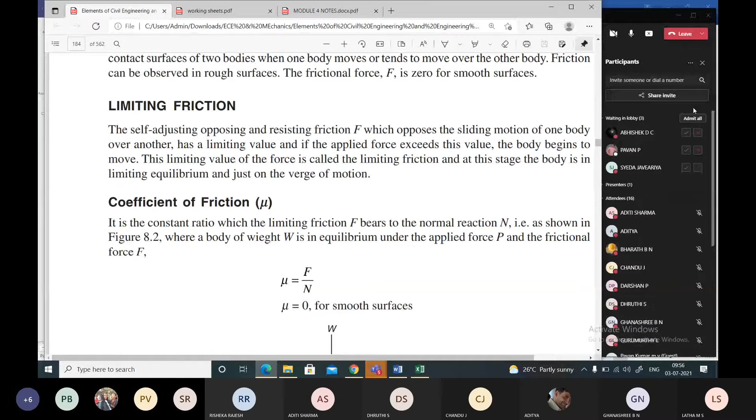How do you define friction? Resistance offered to the motion at the surfaces of the bodies is known as frictional force. Yes, it's a frictional force, the resistance offered against the motion, isn't it?

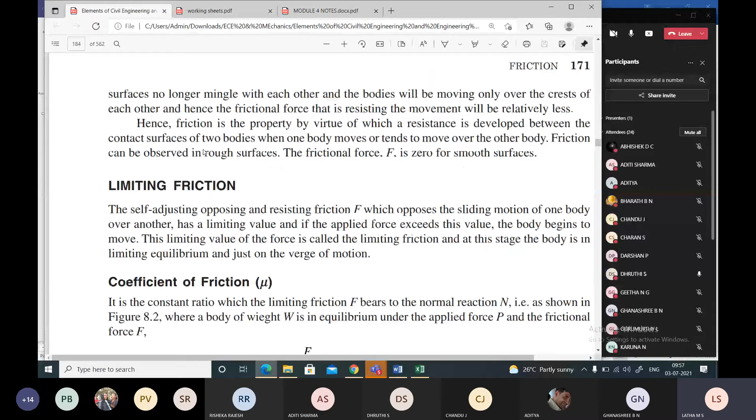Right, so what are the different types of friction do you find? Static and dynamic. Yes, static and dynamic. In dynamic, we have sliding and rolling friction. Is that all I taught only Dhruthi in the class, and what about the rest?

Ma'am, fluid friction, dry friction, ma'am. What about others? Others can answer. It's not mandatory, but when your teacher is asking you, it's your responsibility to respond. Clear, students? You cannot be quiet. I'm telling you repeatedly, once this vaccination process completes, you will be on offline mode. So you don't have much time. We have to quicken up.

Ma'am, first dose or completely second dose? Do you have to get completely vaccinated or no? Having the first dose is enough for now, we'll update you on the steps or levels. Don't worry. If you are vaccinated with the first dose, very good. Okay, I have done it, ma'am. Okay, fine.

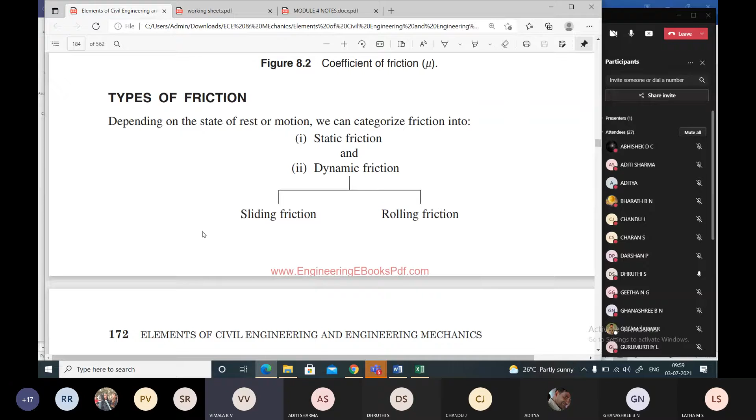Now, what are the different types of friction? Students, I want a mass answer. You cannot be silent. It's written on the screen, but you cannot just read that, I'm asking the whole class. What are the different types of friction? Static friction and dynamic friction, ma'am. Dynamic friction has two types, ma'am: sliding friction and rolling friction. Very good. Next, other student, tell me what is static friction.

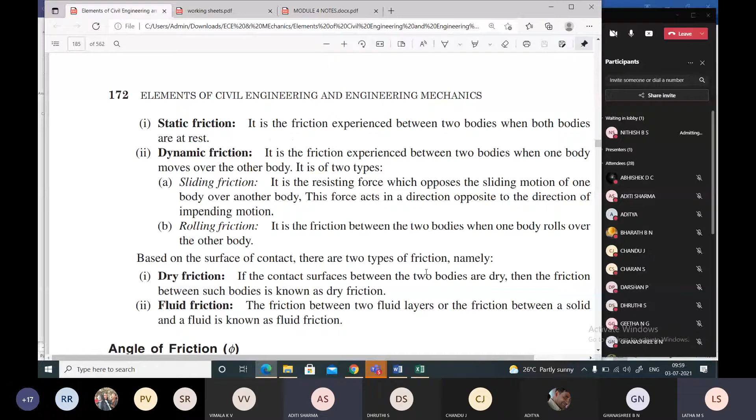Define what is static friction. Any other student? Ma'am, the friction experienced between two bodies when both bodies are at rest. Yes, which are at rest. Any other student, not the same student.

How do you define dynamic friction? Any other student, pick yourself. What about the boys in the class? What is dynamic friction? Okay, I'll pick your names one by one, that would be a better way to call upon, right?

Darshan, Darshan, Darshan P. Darshan P is not in class. Shafahad. Shafahad. Sunil. Yes, ma'am. Can you define what is dynamic friction? Looking at the screen, you have to read out, ma'am.

It is the friction experienced between two bodies when one body moves over the other body. Yes, very good. Dynamic friction is such a friction which is developed during the movement of the body. It can be either one of the bodies - if it moves, it undergoes dynamic friction.

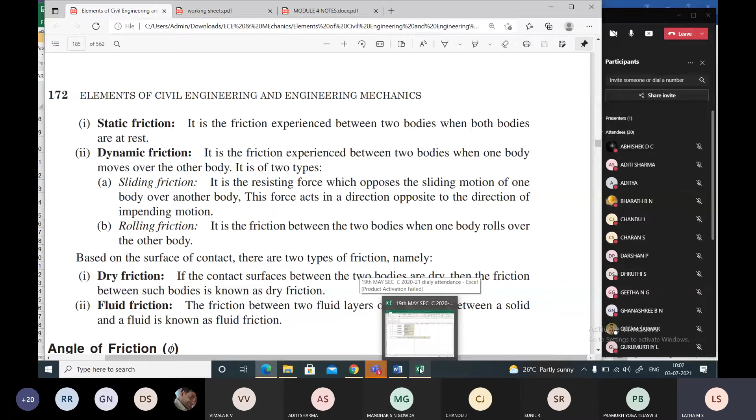Now, the friction is again divided based on the contact surfaces, right? What are the types of contact surfaces? You, Gurumurthy, tell me what are the different types of friction based on the surface of contact. Dry friction and fluid friction.

Very good. How do you define dry friction? If the contact surface between the two bodies is dry, then the friction between such bodies is known as dry friction. Yes, that is called dry friction. Correct. Now next, what is fluid friction? Next person, Gulam, tell me what is fluid friction?

The friction between two fluid layers, or the friction between a solid and a fluid, is known as fluid friction.

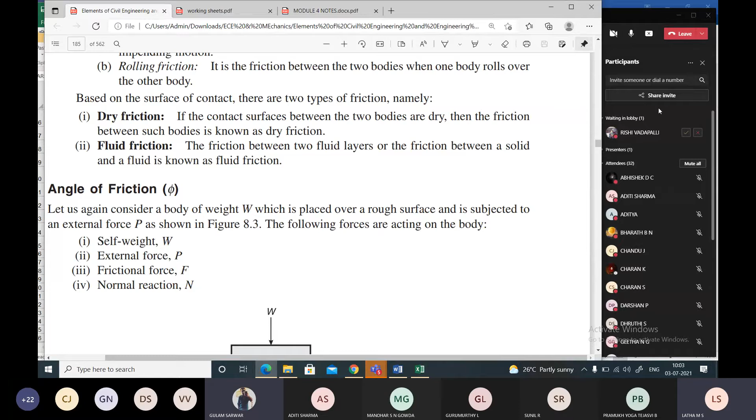Next we learned about the principles of friction. What are the different types of laws, and how are they categorized? Charan, what are the different types of laws you find?

Force of friction always acts in a direction opposite to that in which the body tends to move. Laws of friction are two types: static and dynamic. The force of friction always acts opposite to the direction the body tends to move, and the magnitude of the force of friction is exactly equal to the applied force which moves the body. The magnitude of the limiting force of friction bears a constant ratio to the normal reaction between the two surfaces in contact.

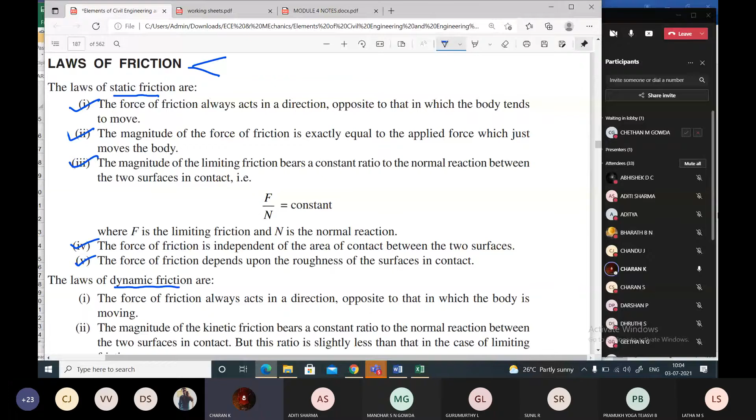The force of friction is independent of the area of contact between the two surfaces. The force of friction depends on the roughness of the surfaces in contact.

Chandu J, tell me what are the laws of dynamic friction? You can read from the screen. Yes ma'am, I'll tell.

The force of friction always acts in a direction opposite to that in which the body is moving. The magnitude of kinetic friction bears a constant ratio to the normal reaction between the two surfaces in contact, but this ratio is slightly less than that in the case of limiting friction. The friction force remains constant for moderate speeds but decreases slightly with increasing speed.

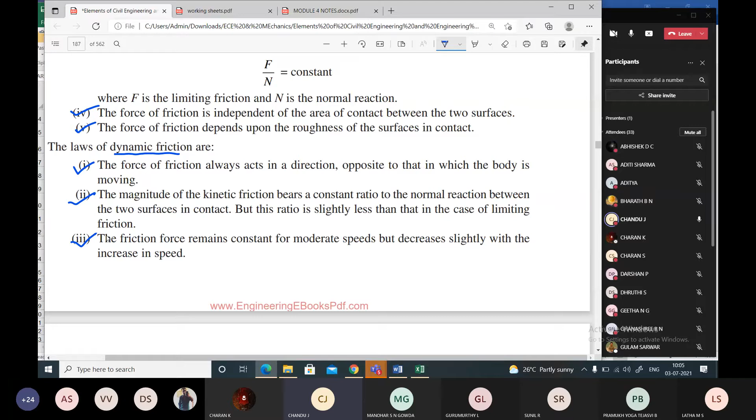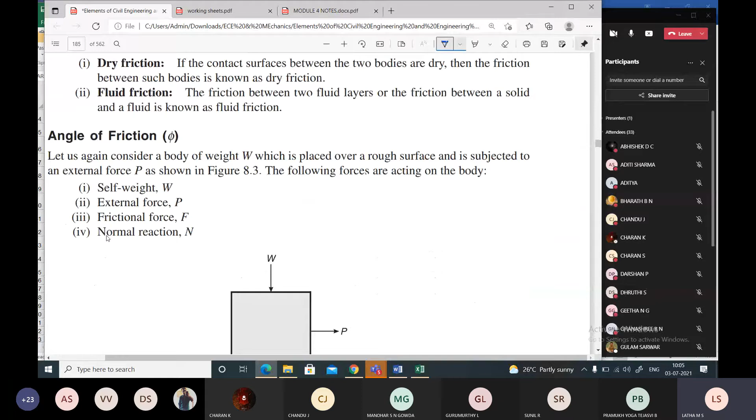Great, very good Chandu. Next, what was the discussion after knowing the laws? We started with the definition, isn't it? So what was the first definition we learned? It's limiting friction, isn't it? What's limiting friction, Ashish?

Ashish is there? Vinay? Vikas? No. Tell me now, what is limiting friction? You can read from the screen. Self-adjusting, opposing and resisting friction which opposes the sliding motion of one body over another has a limiting value, and if the applied force exceeds that value the body begins to move. The limiting value of the force is called limiting friction, and at that stage the body is in limiting equilibrium and just on the verge of motion.

Sure, did all the students understand? A body which is at rest will experience some amount of friction, which is just called friction. But a body which is just starting, or on the verge of moving, will experience a friction called limiting friction.

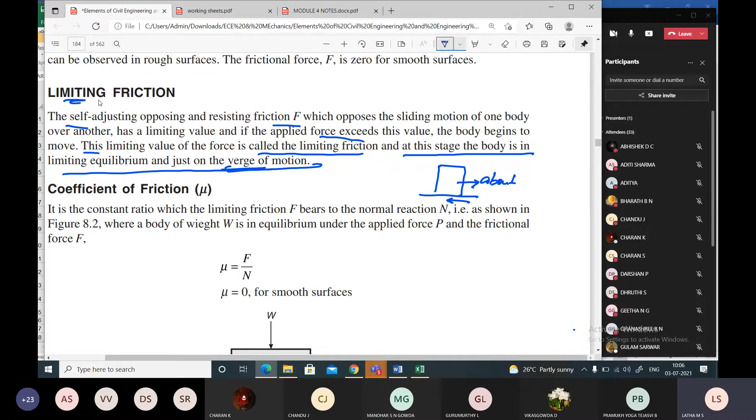Now what is next, what is coefficient of friction? Can anybody tell me? I'll call the name before Vamshi. Vamshi Krishna is there? Preetham? Preetham Nayaka, yes ma'am, tell me what is coefficient of friction?

One minute ma'am. It is the constant ratio which the limiting friction F bears to the normal reaction N, as shown in figure 8.2, where a body of weight W is in equilibrium under the applied force P and the frictional force F. So we give this equation as mu is equal to coefficient, mu is equal to F by N.

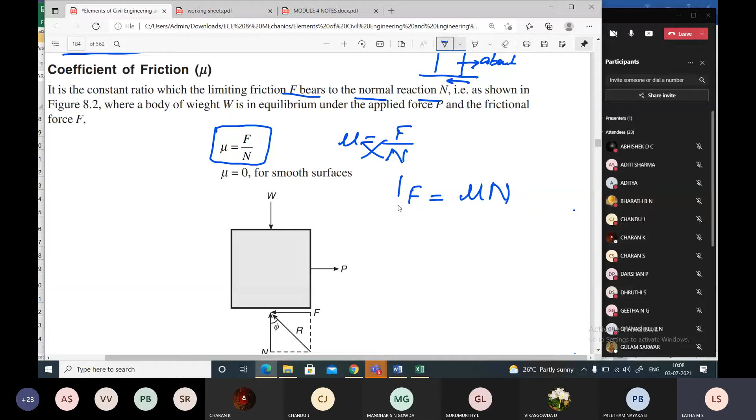Or can I write, students, F is equal to mu into N? Can I write this? Yes or no? By the definition of coefficient of friction, I define that mu is equal to F by N. What is F, students? Frictional force, please remember it is frictional force. And what is N? Normal reaction, please keep this in mind.

And the diagram, you have to refer to this diagram. You can see this diagram: the total weight of the block is W, a person is applying the force P. You find the frictional force opposite in direction to the applied load, and this is the normal reaction opposite to the total load acting on it.

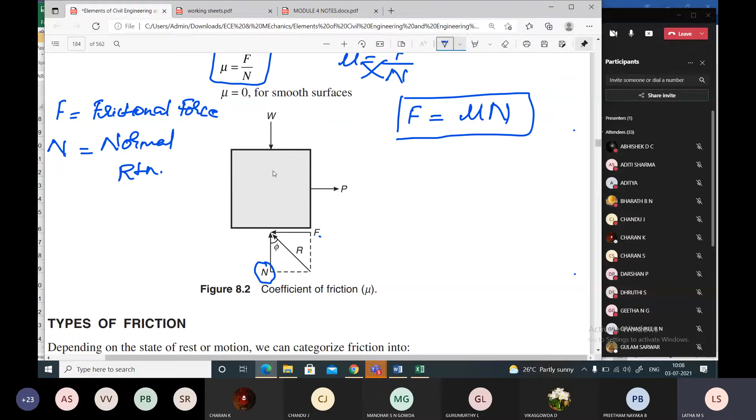So what is coefficient of friction, students? When they ask you the definition of coefficient of friction, you have to write that it is a constant ratio which the limiting friction bears to the normal reaction N. And you have to draw the figure, then give the expression, and state that mu is equal to 0 for smooth surfaces. You are all remembering this, right?

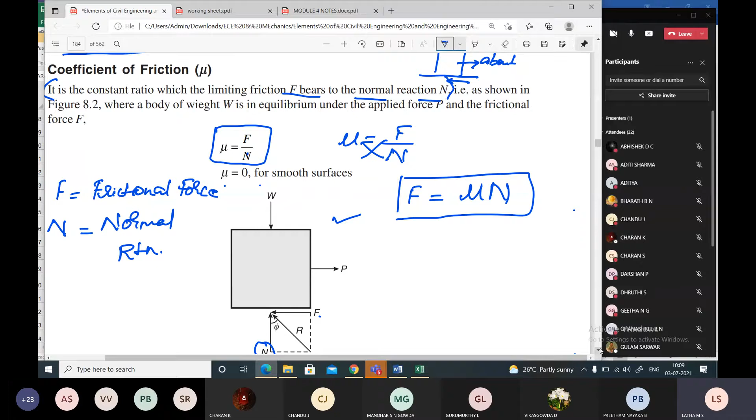And I'll ask you now in the next assignment to write all these answers for the questions. I'm not asking you to write it down now quickly, but you have to be alert in the class, right? It is a very easy scoring topic.

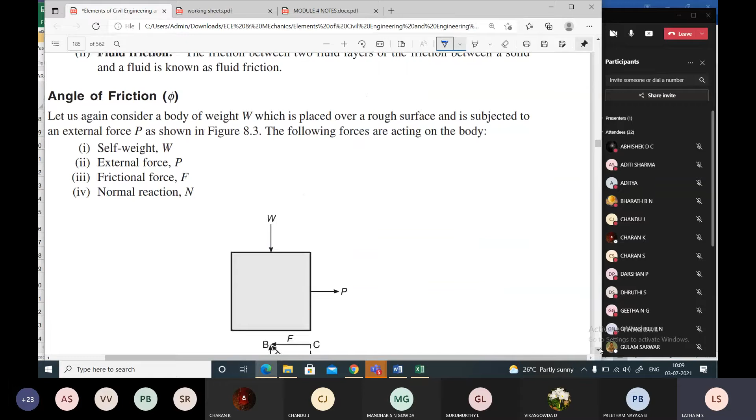Okay students, fine, now what is angle of friction? Prashant Raj? Pawan Kumar? Pawan Kumar MB, yes, tell me what is angle of friction?

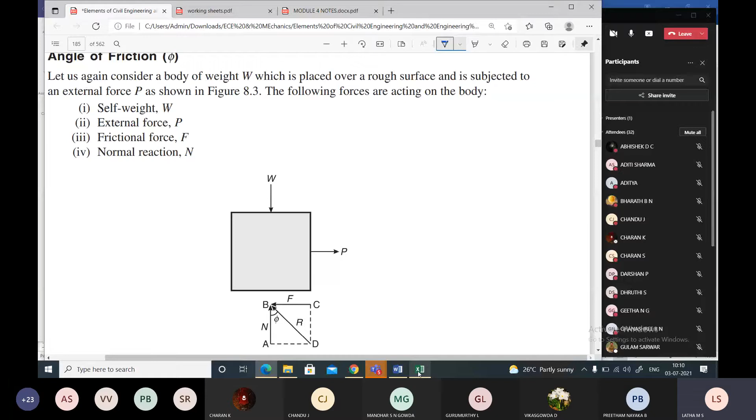The definition is here: the angle of friction for two contacting surfaces is the angle between the resultant friction force and the normal reaction.

Resultant of friction and normal reaction is denoted as phi. What is given, you have to write this definition and represent tan phi. It is denoted by phi, and you have to draw the diagram.

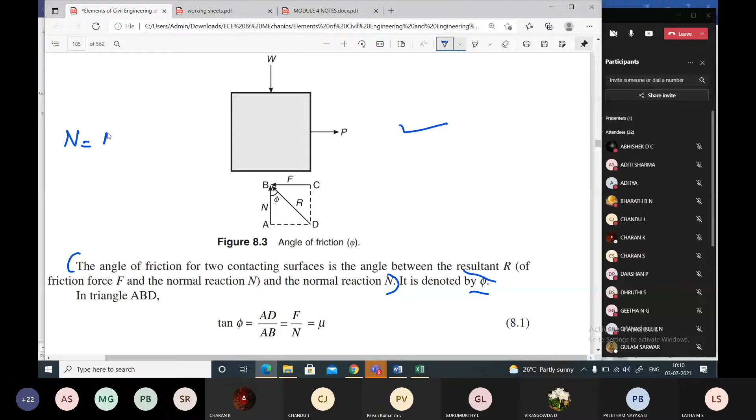So what is N, students? Normal reaction is... Yes, normal reaction. How does this normal reaction come? Because of W, equal and opposite.

What is F? Frictional force. Yes, frictional force, correct. Then what is R? You can see from the diagram, the resultant of frictional force and normal reaction, that gives us R.

So from the triangular concept, we get tan phi equals F by N. What is F by N again, from the earlier definition? Mu. Yes, that mu is the coefficient of friction.

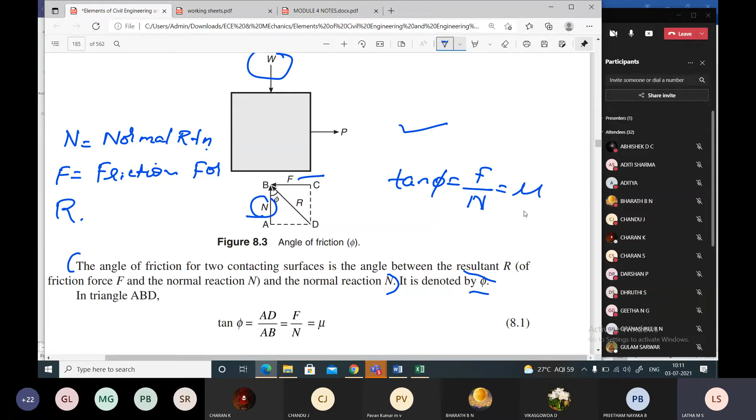Now next, angle of repose. Nithish? Yes ma'am, tell me angle of repose.

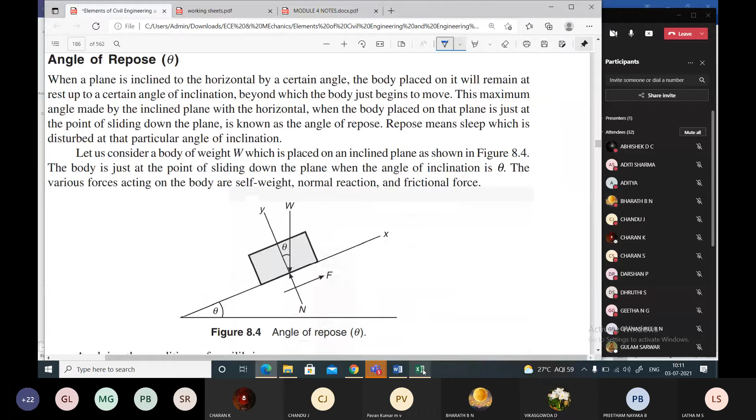When a plane is inclined to the horizontal by a certain angle, the body placed on it will remain at rest up to a certain angle of inclination, beyond which the body just begins to move. The maximum angle made by the inclined plane with the horizontal, when the body placed on that plane is just at the point of sliding down, is known as the angle of repose.

That's enough. What did you understand, Nithish? What did you understand with that? Now, for example, I'll take a worksheet.

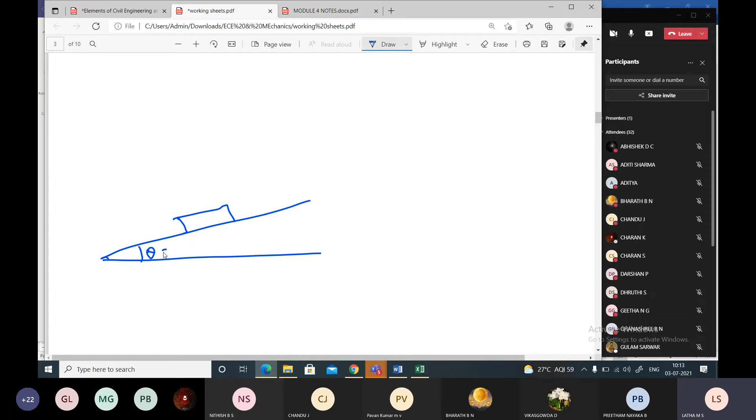Angle of repose. I'll draw one straight line and an inclined line. I'll keep a box here. Do you expect this box to slide down at some angle theta, 10 degrees or something? It may not, or it may be. Now I'll tell you, this box weighing W will not slide down. It will not move down. So it is still at rest.

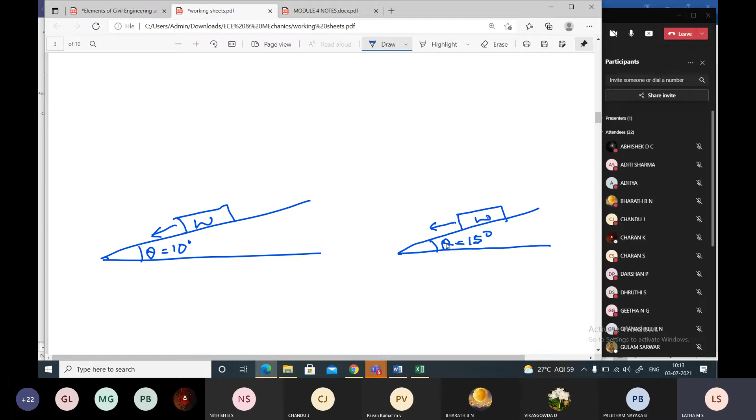Now, with the same setup, I'll increase the theta value to 15 degrees, and place the same block at the same position. Will the block slide down? It may or may not. Correct, it may or may not be, but the possibility is I'll think it is still at rest. Even at this condition, it is at rest.

Now further, when it is not moving, I'll incline more, let's say 20 degrees. So this block will start sliding, start moving or sliding down. So at this point, on the verge of or just starting to slide down, this angle we call the angle of repose. Did you all get that?

Did you all get this, students? Did you follow, the class, did you all follow? What is angle of repose? Am I audible to you? Yes ma'am, the minimum angle at which the body starts to slide down.

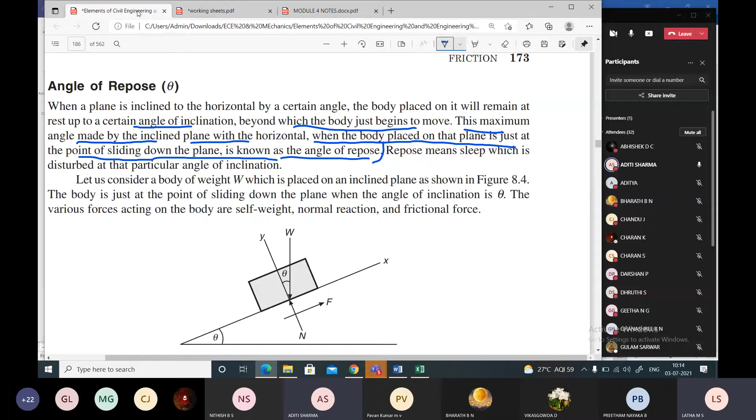Now from the diagram, yesterday we started with the diagram, placing the same block, something like this. And remember, students, the weight of a body will always act straight down, not inclined. It will act straight down only.

Now we have kept a box on an inclined plane at an angle of theta. I'll draw the x and y axis along the plane itself. So applying equations of equilibrium, I'm repeating yesterday's derivation. We'll start doing it here.

Summation of Fx is equal to 0. What are all the forces you find? Do I need to resolve this force, students? This is along the x-axis only, so no resolution is required.

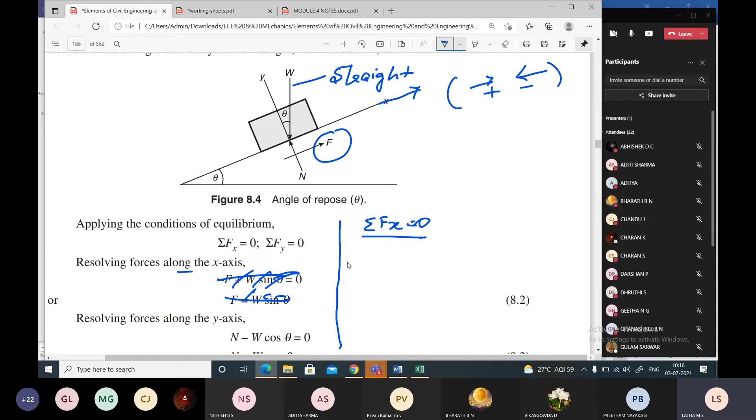So if you don't follow, don't worry about this step, you'll get the same answer. Now how is it moving? To the right side it is plus, and to the left side it is minus. Correct? So plus F. Resolve this, resolve W.

When you resolve, what angle is it making? 90 minus theta. So how is it moving? When I resolve, it will move to the left: W cos(90 minus theta). Is there any other force to resolve, students?

Okay, I'll wait for your answer, then I'll proceed. Till you answer me, I'll not continue a step. Just before I said you had to respond to your teacher. You have to interact.

Did you follow this step? Yes ma'am. So I can simplify writing this as F is equal to W cos 90 minus theta. Correct? So F is equal to W cos 90 minus theta.

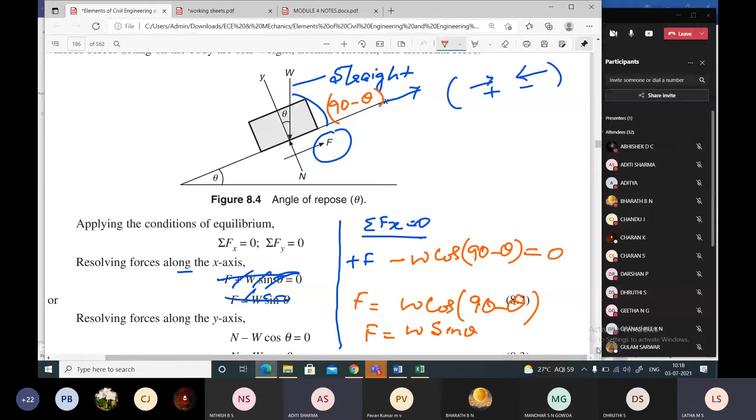What students? What is cos 90 minus theta in trigonometric function? Sin theta, ma'am. Secant theta? Secant theta or sin theta? Sin theta, ma'am.

So similarly now apply equation of equilibrium along Fy is equal to 0.

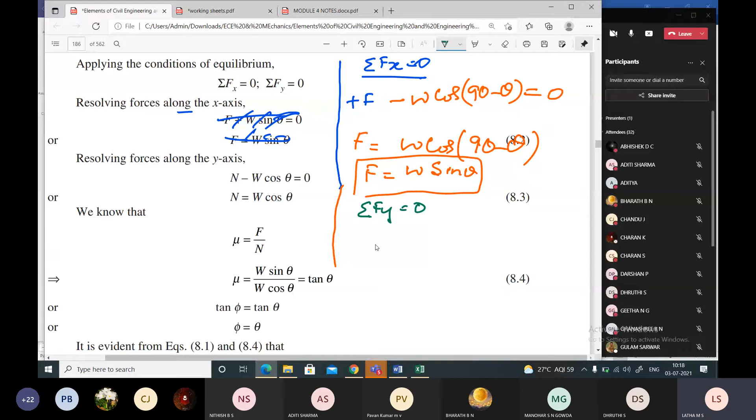Now resolve the forces. What are the forces you find? N and W. Okay, how N is moving?

How N is moving, students? Along the y-axis, it's moving along the y-axis. So it doesn't require any resolution of N. So how is it moving? It is moving upwards, so upwards we take it as positive, downwards we take it as negative. Correct? So upwards positive, so plus N.

Then resolve W. What is the resolution of W? W resolution. Resolution of W, students. Along y-axis.

See, if you don't reply, you are irritating a lot. Without interaction it is not possible to proceed with your class.

W sin 90 minus theta.

Without interaction it is not possible to continue the class, students. If you talk, then I'll continue. If you are not talking, I'll not. Tell me.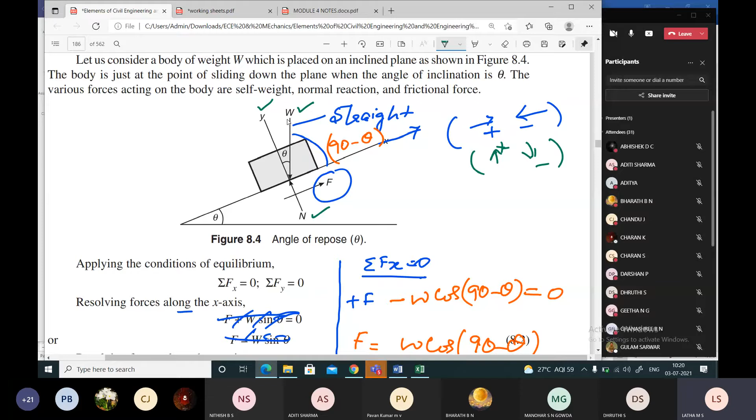W sine 90 minus theta, ma'am. Yes, W sine 90 minus theta. What are all the other forces you find for the resolution? How is it moving? Sine 90 minus theta, downwards ma'am. Downwards, so minus sine 90 minus theta, which is equal to 0.

Therefore N is equal to sine 90 minus theta. Correct? Or we can write it as N is equal to cos theta. So 1 divided by the other. So this is, sorry, W. This should be W, right? So the equations divided by each other, we'll get it as

what? F by N is equal to W sine theta by W cos theta. W cancels. F by N is equal to what? Sine by cos?

Tan theta. But you find F by N is also equal to what, students? According to the previous definition. Mu. Yes, mu. Or you find tan phi. This tan gets cancelled, I'll be left with theta is equal to phi.

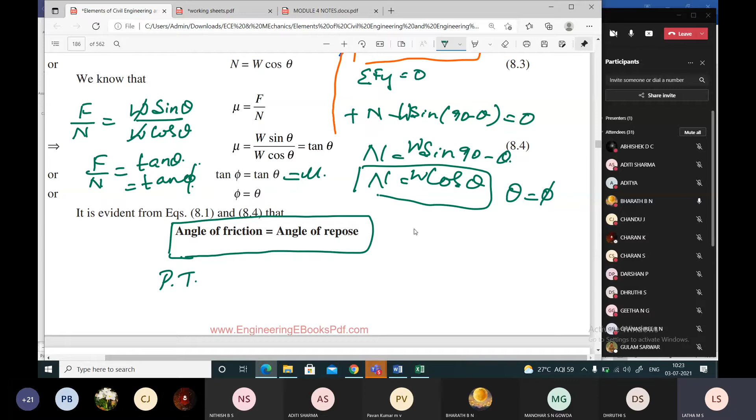They'll ask for 10 marks or 6 marks. Later I'll give you the assignment asking the same question. Okay, you'll be doing it and submitting.

Okay students, this is a very, very important definition. Very commonly, repeatedly they ask what is cone of friction. Okay, to understand the lines, before that we'll explain what is the diagram.

Imagine there are two blocks, A and B. They are the two blocks, correct? So these two blocks are moving towards the applied force direction. You can see here it is moving towards, right? The blocks are moving towards.

When the weight of the block is, let me say W1 and W2, or similar blocks, let me call it W1 and W1. So the normal reaction is N. Here also the normal reaction is also N. What about the direction of force of friction?

Opposite to the direction of the force applied. Correct? You can see this is the direction of the frictional force. See the direction of applied force and friction force. They are opposite to each other.

And now I drop a resultant. What is this resultant? Resultant is with respect to F and N. What is F, students? F is the frictional force. N is what? Normal reaction. Yes, normal reaction.

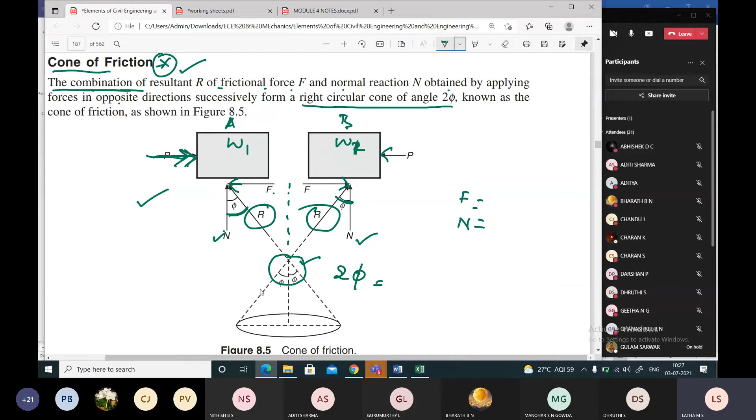The cone of friction is defined as a combination of resultant. Why combination? Because we are combining two resultants - the resultant of frictional force and normal reaction. This resultant is always with respect to the normal reaction and the frictional force, obtained by applying forces in the opposite direction. This forms a circular cone of angle 2 phi, total angle, which is known as cone of friction. Again I'll repeat: you have a combination of resultants obtained due to the frictional force and normal reaction. This frictional force is obtained by applying the load in the opposite direction. When the two resultants meet, they form a cone-like structure having an angle of 2 phi, which is known as cone of friction.

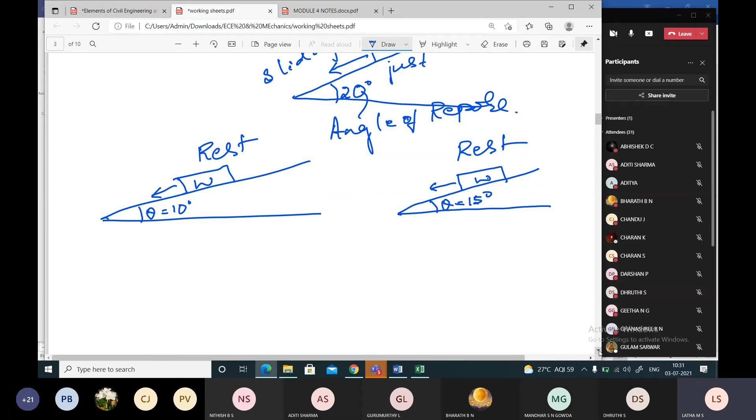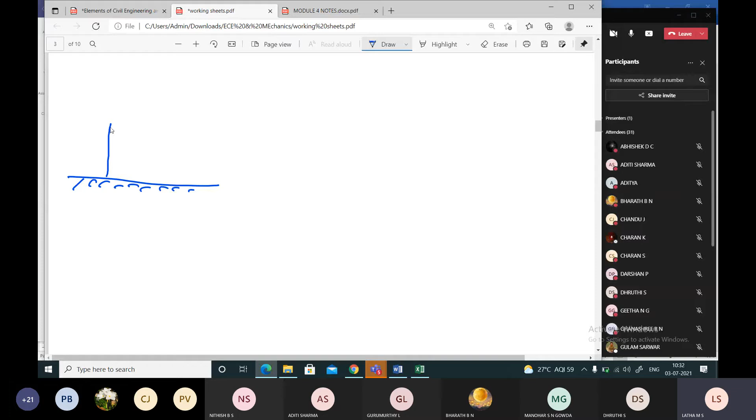Now I'll draw the same sketch. Okay, this is a block with the flat surface. You find the block being placed here, and 200 Newton is applied at an angle of 20 degrees. Correct? Anything else in the diagram? No, okay students, this is what they give.

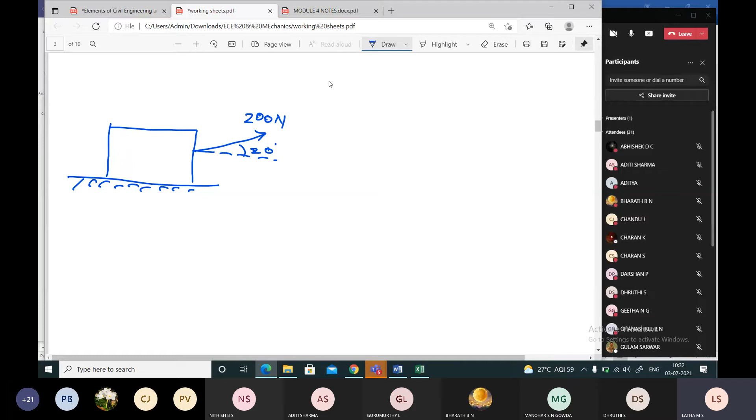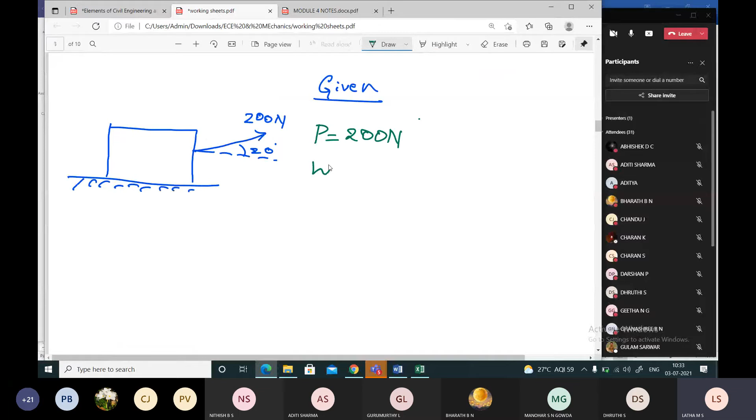Now what is given at first? What is given, students? What is the data given? Am I audible to you students? Force, ma'am. Yes, what is that value given? Force of 200 Newton is given, already it is being said here. So I represent P equal to 200 Newton. Then the weight of the block is 600 Newton, W equal to 600 Newton.

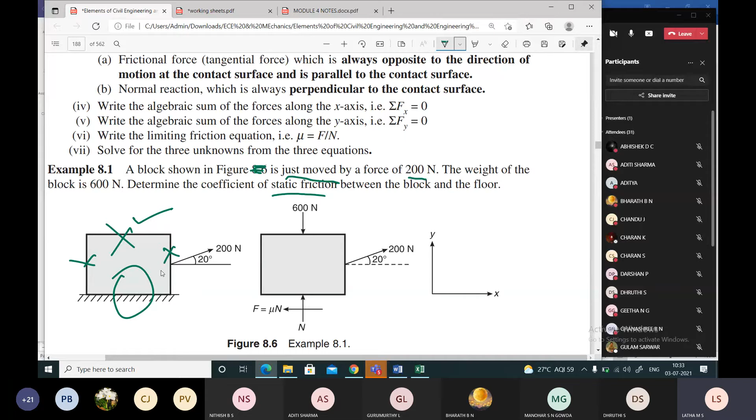Then what is to find? Determine the coefficient of friction between the block and the floor. Always they ask between the block and the floor only, nowhere else - it is not possible to ask anywhere else. Only between the block and the floor do you find the friction developing. Friction is developed only when it is in contact with the other surface. So coefficient of friction has to be calculated, so to find...

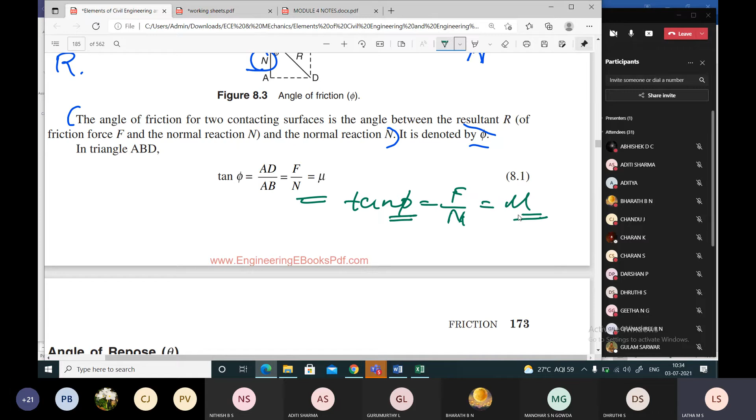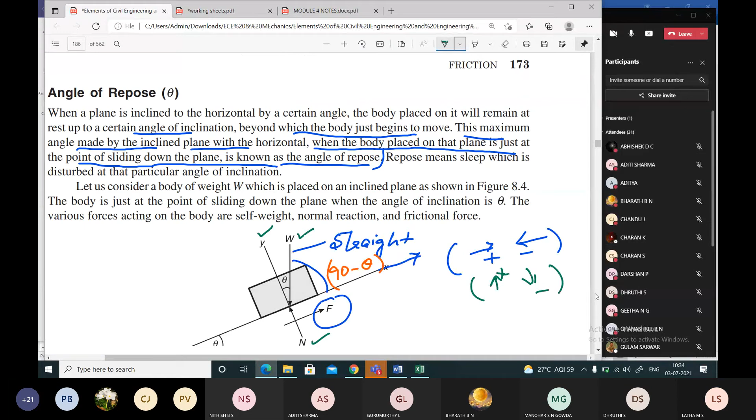Coefficient of friction - how do you represent it, students? Mu. Yes, mu is equal to... what is the equation you have? Tan phi is equal to F by N is equal to mu, right? Now what is tan phi? This is angle of friction. What are they asking? Coefficient of friction, isn't it? They are asking coefficient of friction, correct, in the friction. Yes or no? Yes ma'am.

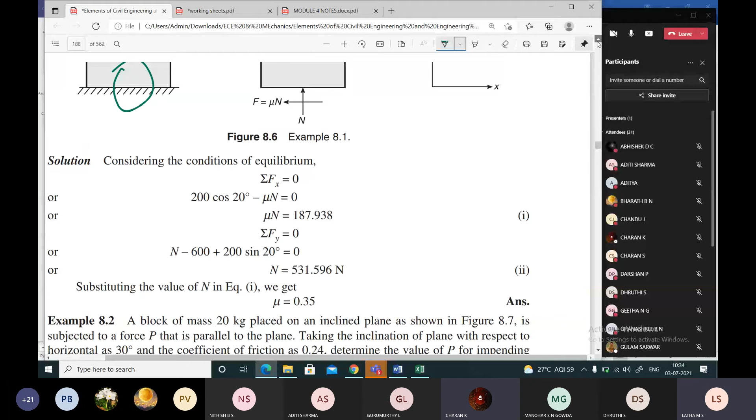Mu is what they have asked us to calculate. So from the angle of friction, we define mu as: we know that tan phi equals F by N, which equals mu. Or F by N equals mu, or F equals mu into N.

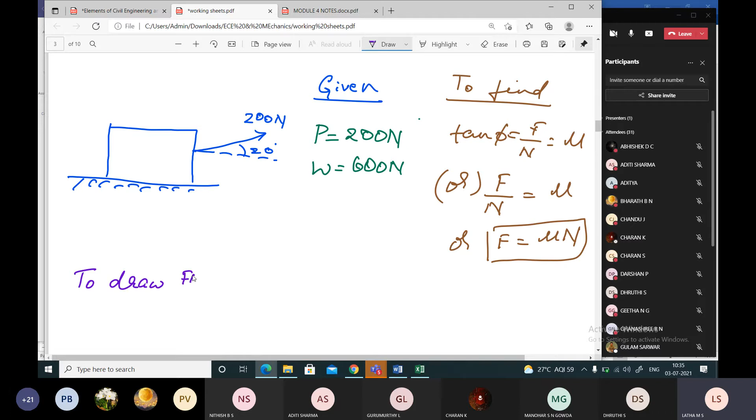Okay, now I'll start drawing the free body diagram. Initially, to understand, I'm writing all of this, students. Once you follow it, it is very easy to draw the free body diagram. First step, draw the free body diagram.

Now what is a free body diagram? You'll be drawing the X and Y axis. Now what are the values? On the free body diagram, you'll be representing the weight of the block, W. How much is W? 600 Newtons.

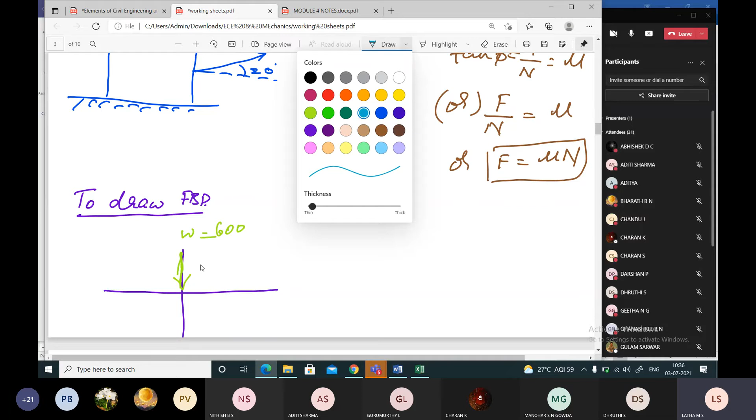And then you find some force is acting at an angle of 20 degrees, 200 Newton. Okay, then what else will you be drawing? That's how the free body diagram is.

Where do F and N come into picture? Remember the diagram: for every reaction or load acting, there's always W acting here, and there's always an equal and opposite normal reaction. There's always a normal reaction for the vertical load, equal and opposite, to balance the load. So in which axis will the N value be acting?

Y-axis, ma'am. Yes, Y-axis. Did you understand how this N has come? It is acting as N.

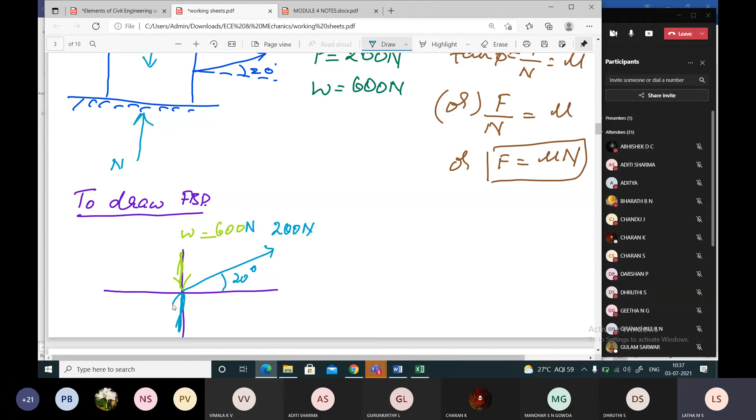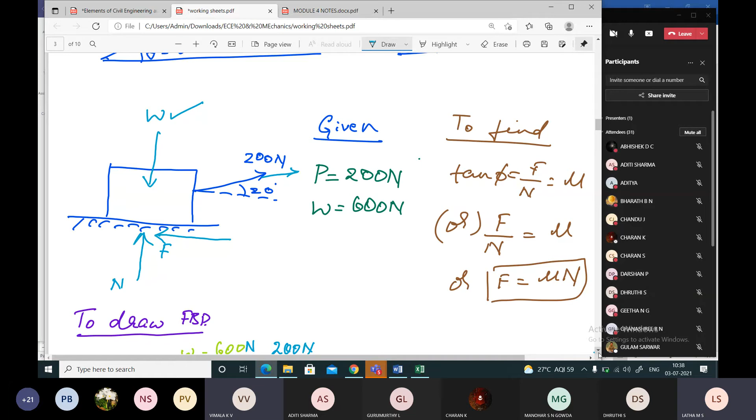Now what about this — it's a friction problem, you should not forget, correct? So when the body is moving or the applied force is in this direction, moving to the right side, how will the friction generate? It will be generated in the opposite direction. So on which axis is it acting? Towards the left, it is acting as F.

Did you all follow the free body diagram? Very easy — F and N are always perpendicular to each other, students. These are all the applied forces. F and N are the forces we are calculating: the normal reaction and the frictional force.

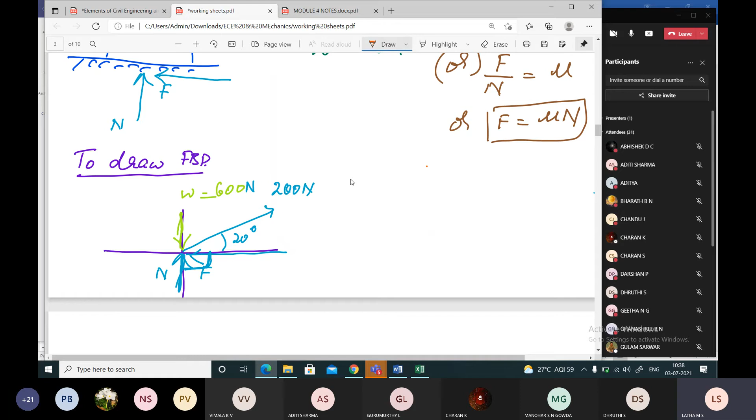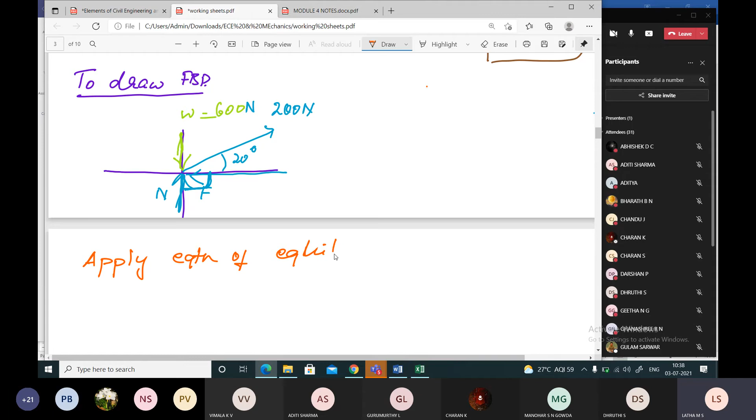Now how to start with such a problem? Very easy — you have to apply equations of equilibrium. Very easy to go about. Now tell me, what is the first equation of equilibrium?

Sigma Fx equals 0. Can you give me the direct equation, students, with plus and minus? Plus 200 cos 20, minus F, equals 0. So F equals 200 cos 20. What's the value?

187.93, ma'am. 187.938. So I can make it 187.94.

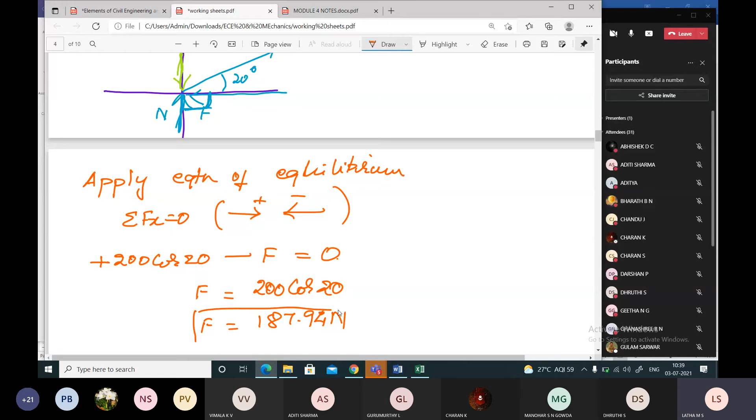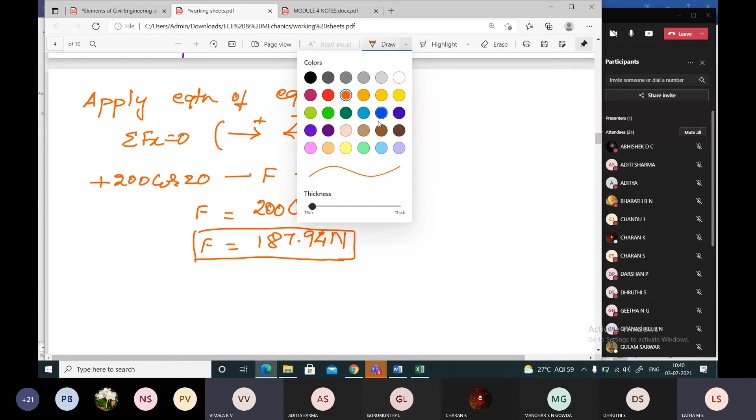Next equation which I'll be using? Sigma Fy equals 0, ma'am. Yes, sigma Fy equals 0. Here upward moving forces are positive, downward moving forces are negative. Tell me: minus 600 plus normal reaction equals 0.

That's all — what about the 200? You have to resolve it. Plus or minus? Plus 200 sine 20. Tell me now: N equals minus 200 sine 20 plus 600.

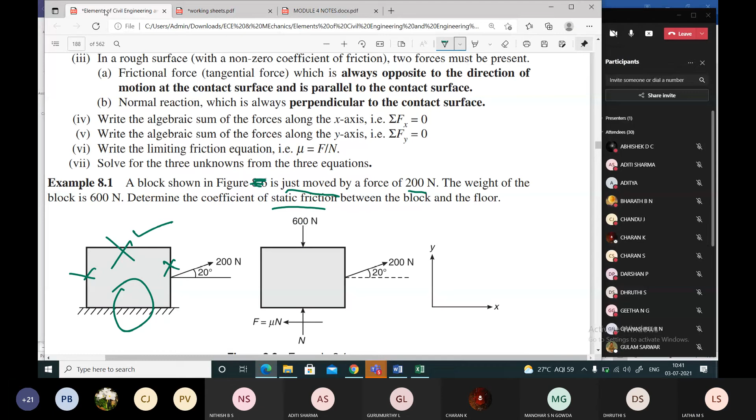What is N? Calculate the N value. 531.595. Okay, do others get the same answer? Yes, ma'am.

Now therefore, what is the coefficient of friction? Mu, by definition, is F by N. F is 187.94 divided by 531.595. What's the answer you get for mu?

0.3535. So I can write mu equals 0.35. Any doubt, students? No, ma'am. Is this clear? Yes, ma'am.